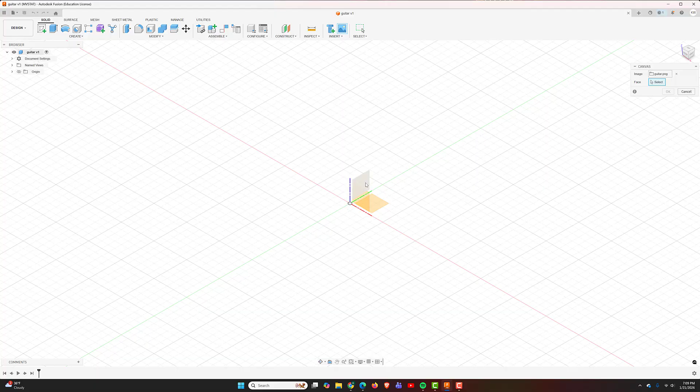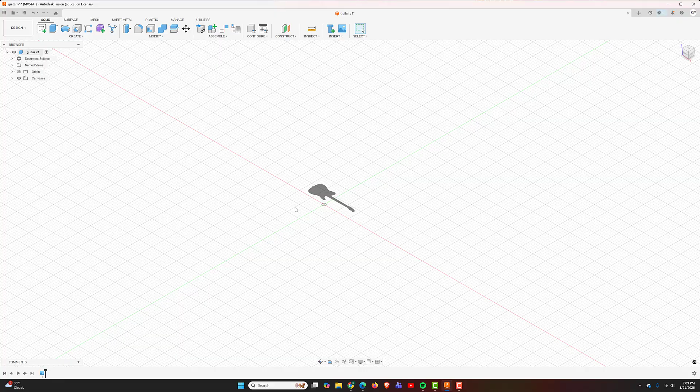And then I need to choose which plane I'm going to make it on. I'm going to put this on this floor plane, so I'm going to select this plane. And then I can scale it and move it from here to position it wherever I want. It's really not going to matter because I'm going to just trace it and then extrude it, so I really don't need to worry about any of that. Then I'm going to view it directly from the top, so I'm going to come up here and hit top. I'll rotate it so it looks like this.

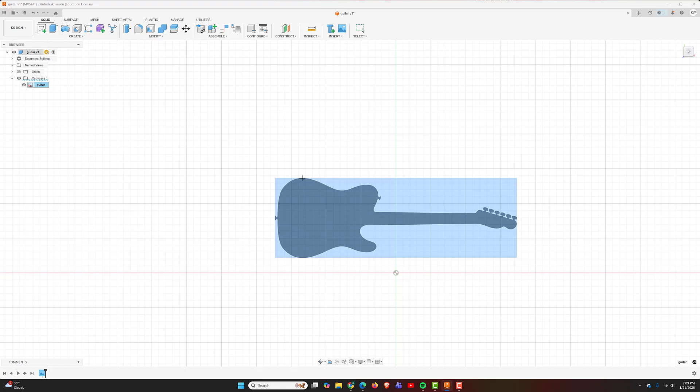Now, we have no idea what size the image is right now, so I'm going to size it to make sure this is a reasonable size. So I'm going to go over here to my canvas that just got added. I'm going to right-click on my guitar, and I'm going to say Calibrate. And then I'm going to choose this point and this point. And we can see that right now it's only 5 millimeters. That's really, really, really tiny. If I were actually making this to print, that would not be a very fun print.

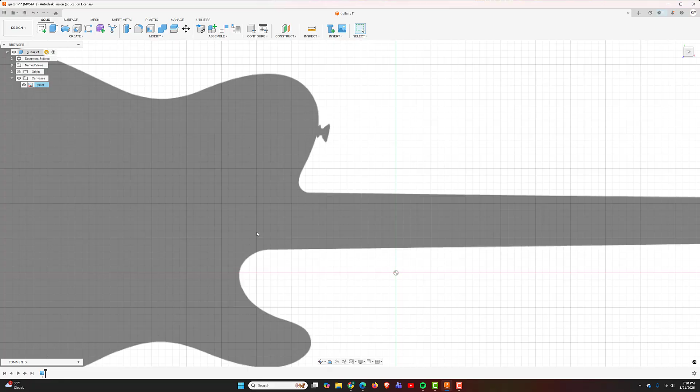So I'm going to increase this to, let's say maybe 25 millimeters. Hit enter. And there we go. When we create this and trace it now, from here to here will be 25 millimeters, which will be a much larger guitar.

So to start tracing it, I'm going to create a sketch, click on that same plane. The lines would be pretty obvious. Those will just be your straight line. So I click, I missed it, but that's okay. There's one line, I'll hit escape to end that one. Then I'll do another one from here to here, hit escape. That's the easy part. Now a lot of challenging stuff.

How are we going to trace all these curves? Well, to trace the curves, we use a fit point spline. So we have the line tool, the rectangle tool, and the circle tool that we've used before. Here is your fit point spline. So I'm going to select that tool, start at this point. It's important that these connect because we need all the points to connect to have a solid shape. I'm going to click about right here.

And then I'll click about right here. And you can see how this is creating a curve. I'm going to drag up until it looks like maybe the curve starts to get off about right here. So I'll click again. And it doesn't have to be exact. You just want it to be close. I mean, I could do a much closer point, but I'll show you how to fix your curves after we make the fit point spline.

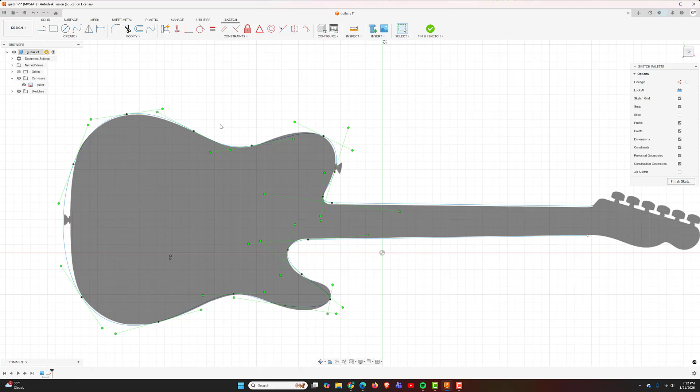Okay, so I've connected to that last point, so that's the end of that curve. Do not hit escape. It will delete everything you just did. Make sure you hit this little green check mark to say I'm done. Then I can hit escape, so I'm no longer creating a fit point spline. And now you'll see all these handles that I can use.

And what these handles will do, so this handle goes to this particular point, I can drag that and notice how it starts adjusting that curve. If I drag in, it'll make it a much tighter curve. If I drag out, it'll make a much wider curve. And then I can rotate it to kind of get the shape that I'm looking for. So that looks pretty decent right there.

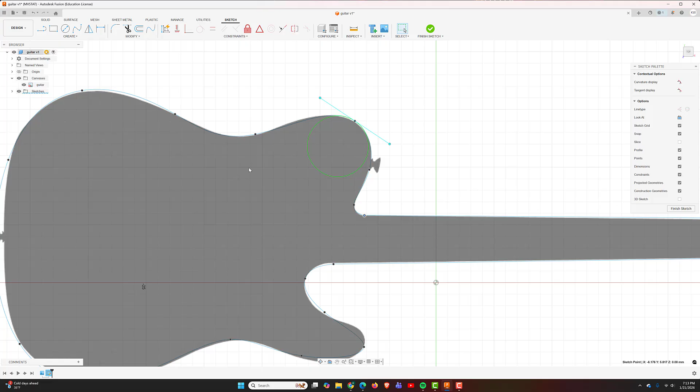This one, I can even take that point and drag it in some if I need to, and maybe drag this in a little bit. There we go, that looks good. So once you create curves, go around to each of your points, grab those handles, and just kind of try to manipulate the line to get it as close to the shape that you are going for.

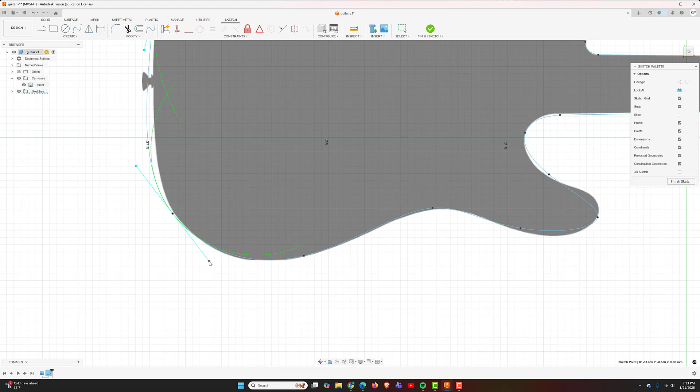And then to finish this off, I'm obviously going to have to do the same thing over here. So I'm going to pause the video and do this so you don't have to see me meticulously go around all these. And then I'll show you how to finish it. Okay, the sketch is done. So now I'm ready to extrude. So I'm going to click on the guitar part, and you'll notice I actually created these as separate sketches. So I'll start with just the guitar.

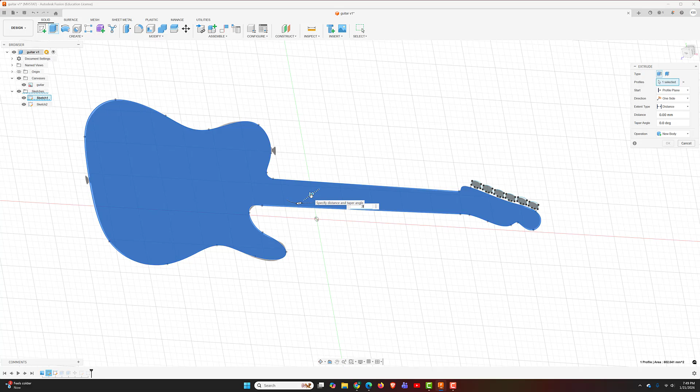I'm going to hit E to extrude it. And I'm not going to extrude it very far. I'll just maybe make it like 2. And then I'm going to select each of these. I'm going to hit the first one, then hold Shift, and select the rest of them and hit E. And make these 2 millimeters as well.

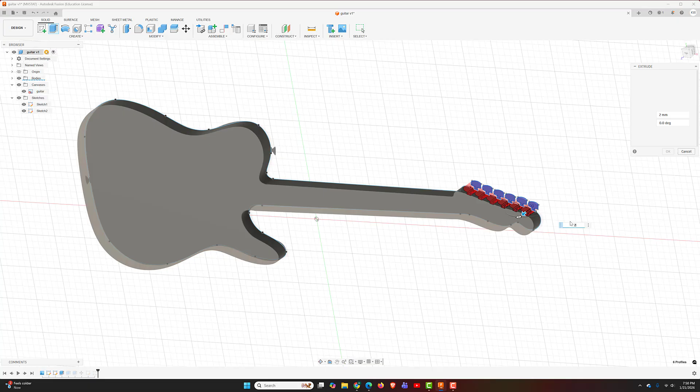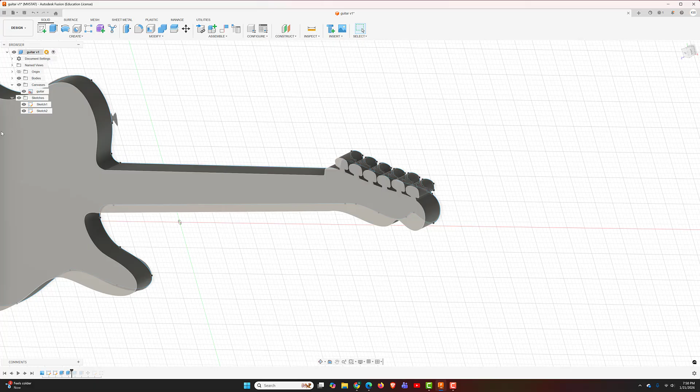Although you notice I didn't realize it was going to do that. Since it was overlapping a little bit, it actually turned that into a cut. What I can do, I'll go back and double click on that. We can see that it was a cut. I'm going to change that to a join so it joins with the previous body and hit OK. And then I'll hide my canvas and I'll hide my sketches. And there we go. There's my simple little guitar.

So that is how you can take an existing image from the internet or wherever, and you can trace it, extrude it, and turn it into a very simple little 3D model.